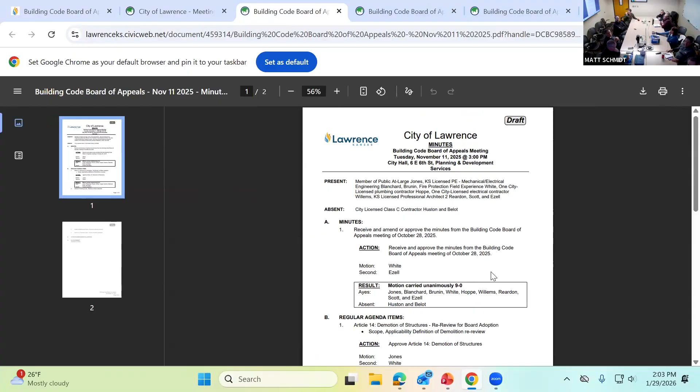Okay, did everybody get a chance to see the minutes from November? They're online, probably just the meeting recorded. We didn't have those last month, so we also have December this month. Any objections to the minutes? Is this summary right here, Matt? This is November. There's 2 meetings worth of minutes to review and approve, so this is the first one.

Going back a ways, if you recall, we did those several ordinance approvals. Cleaning those up are the demo, and then we went through plumbing, mechanical, fuel, and gas. We just did demolition. We did the other ones previous, so we came back with some edits to the demolition of structures that you guys wanted us to.

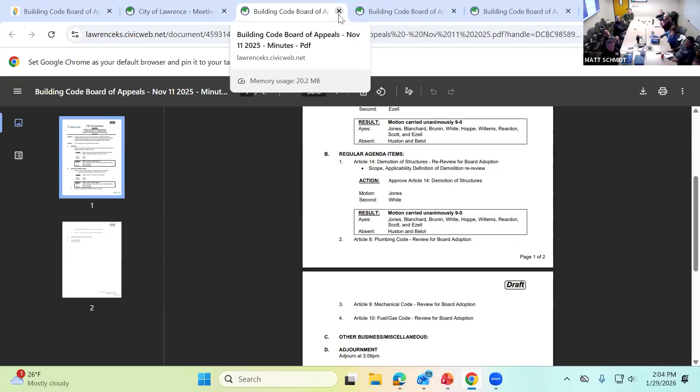You need to approve those separately. Yeah, this is the first one, and then we'll do the next one. We want to approve it first. Motion to move, Warren, I'll second, second by Adrian. All in favor? Aye. All opposed? What was JJ's response? Aye. Okay, there we go.

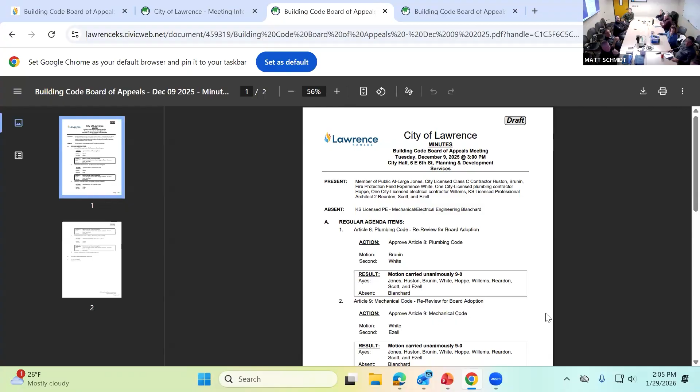And then this is December 9th. So then this was adopting plumbing. We adopted mechanical, we adopted fuel and gas. Here we gave you a quick overview summary of the accessibility, with no proposed amendments. We didn't adopt it, we approved it. Okay, yep, we did. So this is the follow-up with plumbing, mechanical, fuel, and gas, and then we reviewed and adopted accessibility.

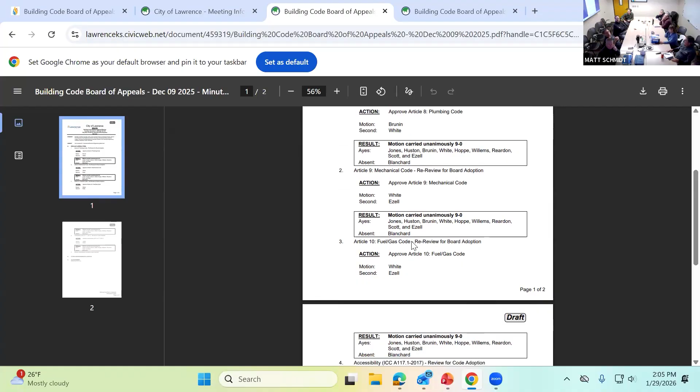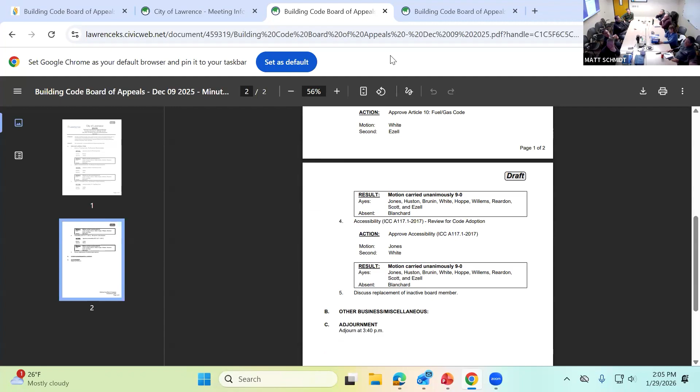Sorry, flip around, those are the reference standards in the code, referenced in the standards, reference standards, Adrian. And that was all. I'll move to approve. Second. All in favor? Aye. JJ, yep, I said aye. Any opposed? And that also passes.

Excellent. First, before we get into IRC, was to give Mr. Myers a chance to introduce himself for those who don't know him. Mike? Hi everybody, Mike Myers, Hurley Associates. I've been working in town here since, I don't know, it's going on 30 years now. I guess I've been a licensed architect since 2007.

Miss Janet, if you're ready. Janet Smalter, for those who don't know her, registered architect, and our residential examiner, among other things. Right into the presentation. If you'll hand me the mouse.

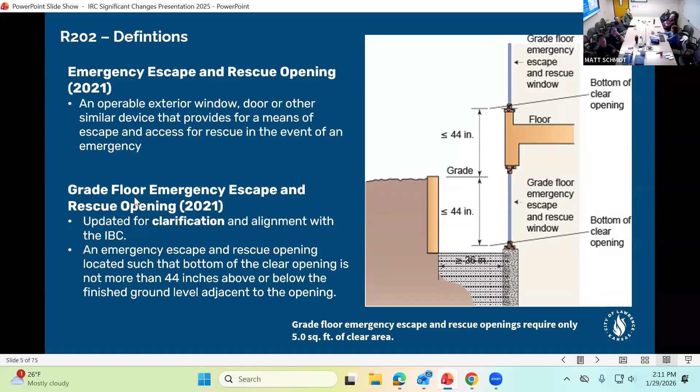What they're trying to say is just that the opening should start at the glazing - it's 44 inches. The bottom of the clear opening is where it starts and ends at the grade for a grade floor opening, and from the grade to the opening again for that 44 inches when you're doing grade floor emergency escape and rescue openings.

So they don't use that windowsill anymore. Right. Townhouse definitions - this is significant when we go later on in the review.

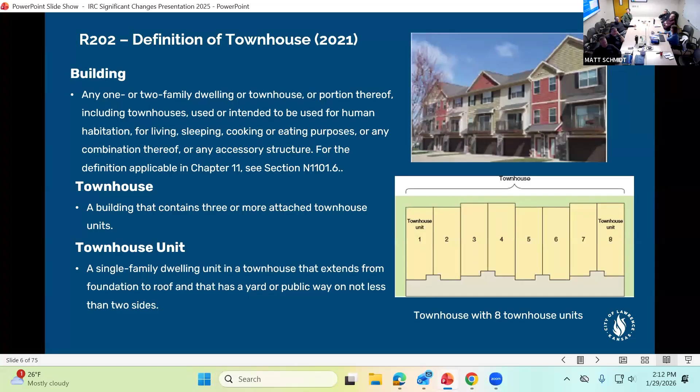They are now saying a building, they break it down to building, a townhouse, and a townhouse unit. So the building is a structure of a one or two family dwelling or townhouse, and it includes accessory structures. Then a townhouse is a building that contains three or more townhouse units, and a townhouse unit is a single dwelling. We'll see why they use that later on in this review.

Then the next thing is an addition that I'm proposing for the city - this is a City of Lawrence definition. I do want to take out the word duplex; no longer do we need this word, it's antiquated and not to be used anymore. The ICC codes use two family dwellings as the definition. You do not see the word duplex in any ICC codes - two family dwellings is used.

Obviously, a dwelling is any building that contains one or two dwelling units designed to be built, used, rented, leased, or let out or hired to be occupied. The City of Lawrence Land Development Code now defines that type of structure as a two-unit dwelling. They refuse to use two-family dwelling - I begged them to use that, and they would not do it. They use two-unit dwellings, so no longer will we use this terminology in any reviews that we do.

The planning department will use two-unit dwellings, and I will use two-family dwellings.

The definition of a rain screen system is not what you think of as a rain screen. A rain screen system is that area of airspace behind the cladding.

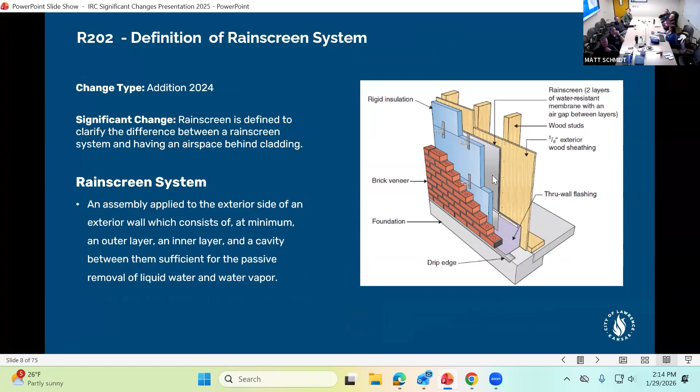So what is the confusion, Janet? Do you ask for a design professional sometimes and other times a registered design professional? Yes. Why would you ask for a design professional as opposed to a registered one? Just somebody that knows what they're doing, knows how to draw a set of plans -- don't hand it to me on a napkin, basically. But when I mean a registered design professional, I mean somebody like me who has put their license on it.

If there were objections saying all plans have to have that, you're saying all plans do not require a registered design professional. So is it that if they differ from the code they need a design professional? Exactly. If they're designed outside of the prescriptive code, if I cannot look up and verify that it meets the code requirements in the book -- say they design a beam I cannot verify by reading the code book -- then I would ask for a registered professional to provide stamped plans. And you also have to meet the minimum standards of the state. So if the state requires a registered design professional, the city can't override that.

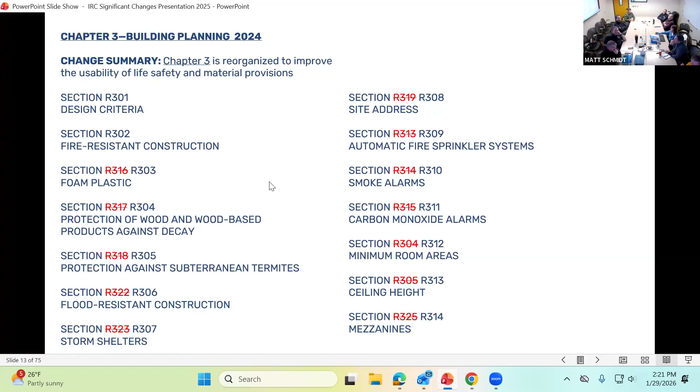All right, so part two is building planning, and we will go through that now. For whatever reason, they decided to reorganize all sections of chapter 3, and I can only imagine sitting through that meeting and how long it must have taken for them to agree on the reorganization of this section. So that's what they've done here.

Nothing's really changed of significance here. I think they dropped this down to either 115 or 110, I can't remember. The snow loads have not changed. Nothing else I can think of along here. We'll stay with the same frost line depth. Nothing else -- so on the winter design temperature.

Now that we've moved significantly from 10, is that -- if she can call me and go on speakerphone if she can't get logged in -- J still saying 10, but the design temperature is now 4. Well, I've always gone with the ASHRAE design temperatures, and I will get that verified with whatever.

Yeah, the thing says they must have been updated less than 20 years ago. But it looks like somebody's gone to a 4 for our area winter design. I think that used to be like an 8 or 9. Yeah, I will have to verify it with the book and whatever.

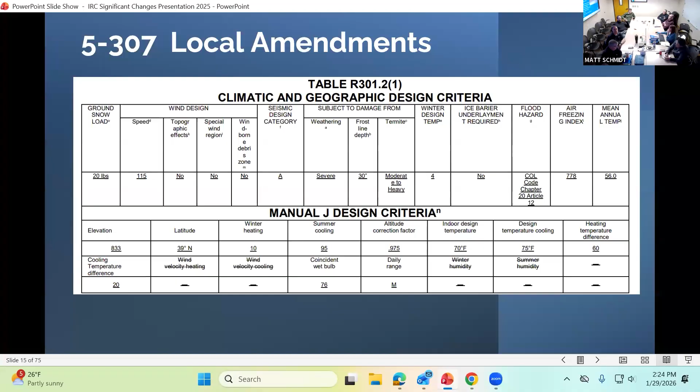Oops, sorry about that. And that's gonna get more important when we get to chapter 11. Yes, it will be. So we'll make sure that we verify all this and that it's correct with the current code for 2024. Okay, so intermodal shipping containers are an addition that were put in 2021.

And it basically says that anything that's in the IBC as well requires an engineered design for the use of these containers.

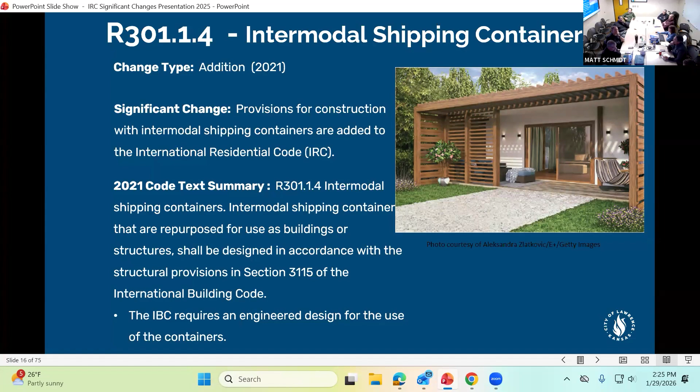We've had quite a few applications with these intermodal containers. Studio 804 did a project using these containers. They had quite a bit of difficulty making them code compliant and energy compliant, but they were successful. I don't think they'd ever do it again. It costs more than just building normally. We've had a couple other people approach us with it, but they turned around and said, nah, maybe not. So I don't know how many projects we'll see with it, but they're now in the code.

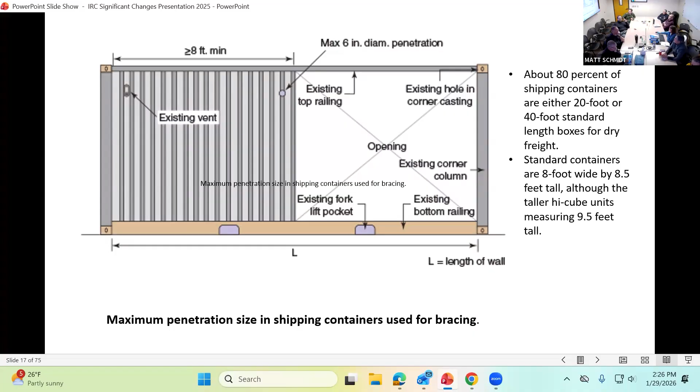Size is just, it's challenging to make them useful because the openings are limited, and there's just a lot that has to be done to make them energy compliant.

Exterior walls — this is gonna be one that we're going to be challenged on, and I think this will be one of the things that we'll have to look at and discuss further. This is a change that has been needed and intended since the 2018 codes, as far as I can tell.

What they want us to do is, the intent of the code is to say that there is an imaginary lot line on all townhouses and two-family dwellings, and that imaginary line extends all the way to the property lines. You have to fire rate the structure all the way to the property line, so any extensions, projections, or openings have to be fire rated along those lines.

So what I'm trying to say here, we'll go to the next one: decks. Everything — overhangs, balconies, two-story decks, etc. — have to be fire protected.

Are they asking for structural independence at this point for a two-family dwelling? Yeah, they are, because they haven't in the past, and that's what I need to study a little bit further.

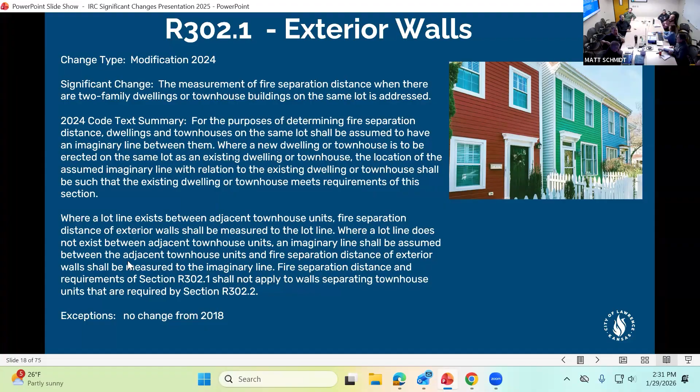Have they taken out the section on draft stops in lieu of separation in the attic then? I don't know the answer to that yet - I haven't studied it carefully enough, so I'll have to come back to you. But let's see what they're saying.

I'm getting to the point where it sounds like there's not a whole lot of difference between a two-family dwelling and a townhouse. And I think there is an intent to be a difference, right?

It looks like they are requiring it fully extended to the exterior walls, roof, or foundation for complete continuity. So I don't think you can do the draft stop - there hasn't been an exception, at least in 2021. Maybe that's changed.

You just have a draft stop in the attic - but it specifically says roof. That would have to be a barrier wall between the two roofs - fully extended, that's almost like a block wall. Beyond that, there's always been an exception, I don't know if they've taken it out, but it's still in there.

If we're looking at 302.3 - under the significant changes, in the 2024 code: dwelling units and two-family dwellings shall be separated from each other in accordance with sections 302.3.1 through 302.3.5, regardless of whether a lot line exists between the two dwelling units. So it's 1 hour regardless of whether there's a lot line between them or not.

So what happens when you go in after the fact and make them into townhouses? That's the issue. No matter now or in the future, whatever, whether there's a lot line between the two units of the two-family dwelling, it's still just 1 hour. But I don't understand what the issue is.

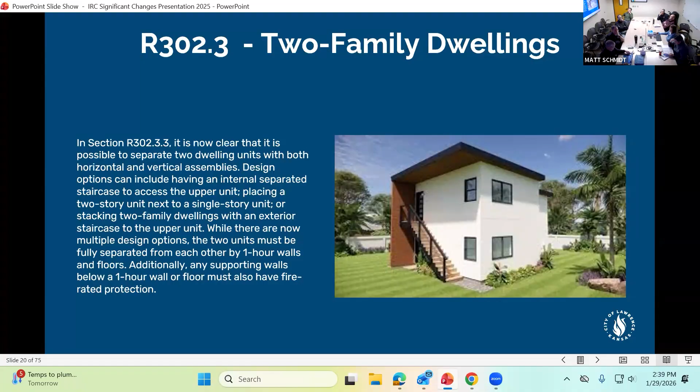So for 2-family dwellings that are separated horizontally, there's some more information on what's required for them. There's lots of options, but now it talks about how you have to have fire rated protection with the supporting walls, etc.

It also now requires that the smoke and CO alarms have to be activated in both units. So if there's a fire in this unit, it activates smoke and CO in the other unit as well. That's a new requirement.

I'm not sure I'd ever want to live in one of those. It sounds like a good idea. It's a good idea for life safety. It ain't a good idea for a bad cook.

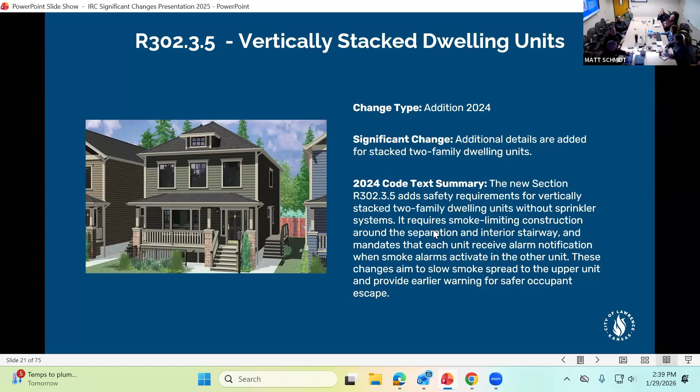Is that only on vertically stacked units, or side by side? That's only on vertically stacked units, not side by side. Correct, vertically only. Apparently this has become a very common design thing in other parts of the country - shared accessory rooms in a 2-family dwelling.

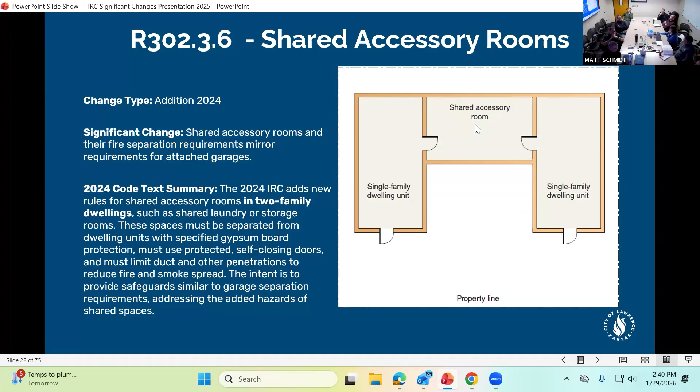It's for like laundry or storage rooms. So what the fire protection is similar to, like if this was a garage area - the separation is 1/2-inch gypsum board on the walls and ceilings, and doors are the same type of protection.

I don't know how this gets regulated as far as how people keep it between themselves as far as ownership, but that's a civil problem, not a code problem. It's a very strange kind of setup, but I've actually seen it allowed in an existing building on Ohio Street. Don't see it very often - older building, nothing new.

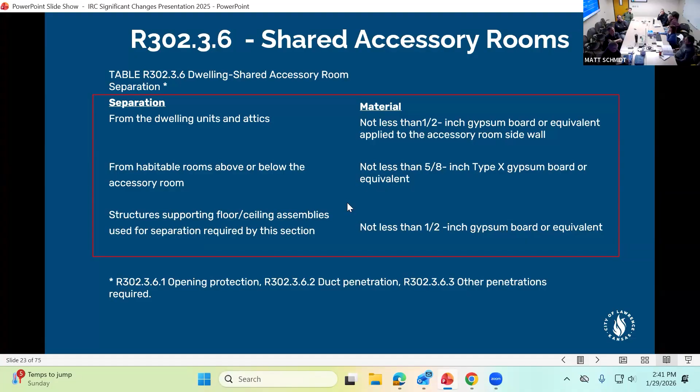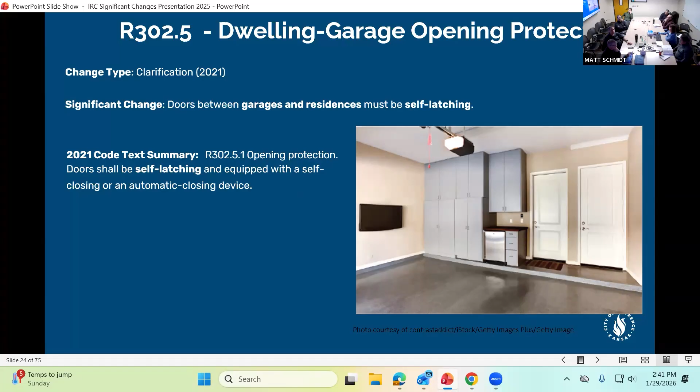Garages now also - those garage doors now have to be self-latching in addition to self-closing. That's a clarification, apparently in the 2021 codes.

They are now allowing clearances to be 6'6" in basements and on main floors as well, for beams, with a distance of 36 inches between the beams. Apparently that's based on door heights, but it used to be 6'8", 6'8" to 6'6".

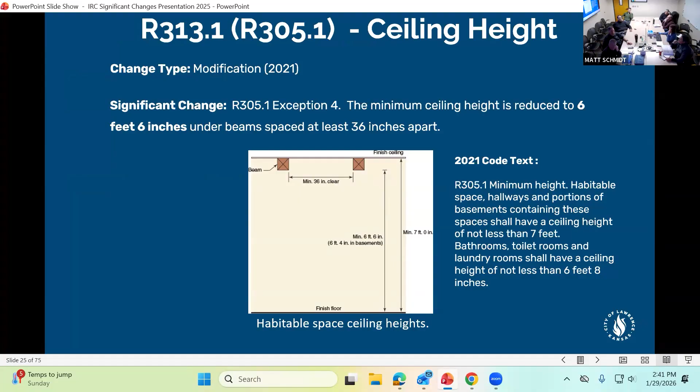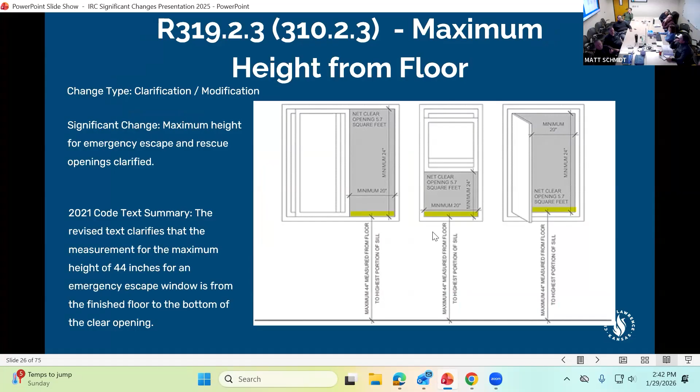They tried to clear up again the clearance, the distance of openings to windows, and for some reason they're making it harder for people to understand. It's to the opening of the window, not the rough opening of the window. So it's 44 inches to the opening of the window itself.

They are no longer calling these areas window wells. They're calling them area wells for emergency escape and rescue openings. And then they give some different information on what the clearances are in those areas.

Can you go back to that real quick, Janet? Didn't that say 30 inches down there on the bottom picture? Did that used to be 36? Used to be 36 and now it's 30 inches. And then there's discussion on how the steps out to grade are allowed, et cetera. Is that only when you have steps out? Because I thought on the previous picture it was 36, but now it's 30. Yeah, this whole section has all been rewritten.

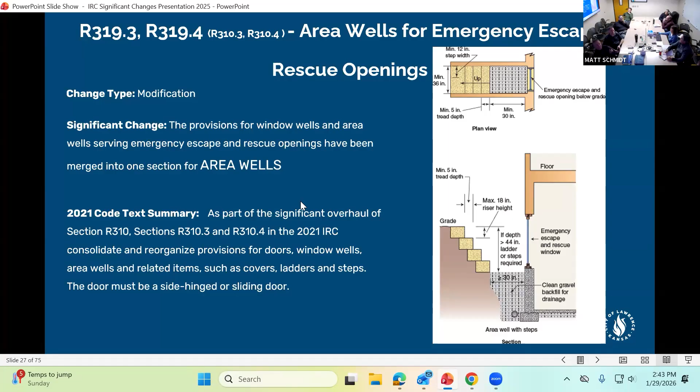Smoke alarm installation is now based on the manufacturer's instructions, and it's basically all about interconnection of the smoke alarms, et cetera. They've kind of given up writing how it's installed in the code.

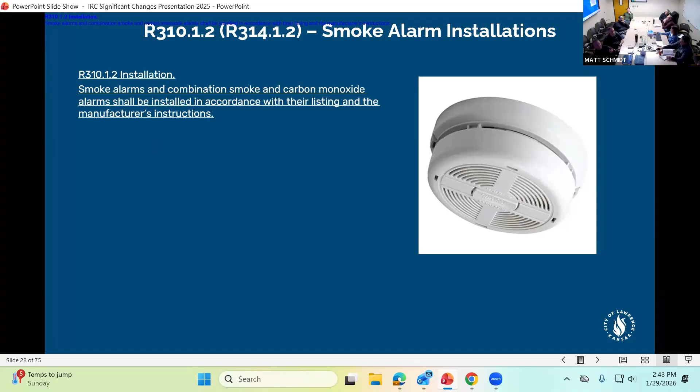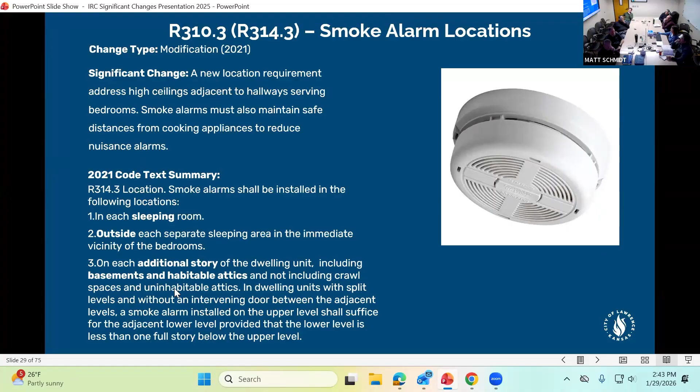Pretty funny. Smoke alarm locations are still all the same here: in each sleeping room, outside each sleeping area, et cetera. And then they've added some stuff having to do with smaller unit designs, tiny houses, et cetera. They've also said, in a hallway, if the hallway gets taller, then there needs to be a smoke alarm there. And then they're talking about smoke alarms adjoining sleeping lofts and smoke alarms near cooking appliances. They've clarified that information.

Dan, previously did I see something about attics? Not required on uninhabitable attics. Okay, can you just... I don't think that's changed, Adrian. Not required — is that what it said? That's what it said, okay. Wouldn't that be with temperature requirements with the detector too?

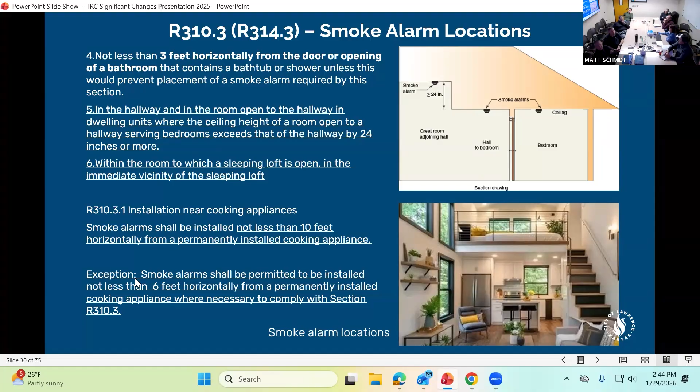Carbon monoxide alarms — this is new, and this is going to be a shocker for our contractors in town. When you are repairing any existing fuel-fired mechanical systems, this will now trigger the requirements for carbon monoxide alarms to be either installed or confirmed existing, confirmed that they're in place or needed to be installed.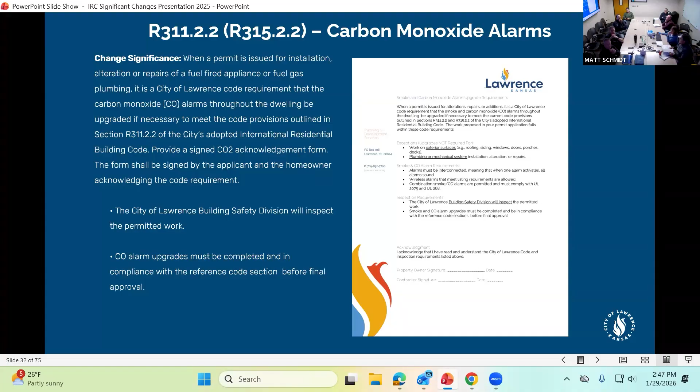And if we can go back, because I didn't read it, I have trouble seeing it — so if you work on a furnace, like you're going to change the board or something on the furnace, you've got to upgrade your CO in all the locations that are required. Okay, and does it specify working on the exact — I'm just using this as an example — Sarah came in, worked on my zoning dampers.

Does that kick it off, or is it just working on that equipment? Any fuel fired equipment, yeah. So we strongly suggest people have annual maintenance visits, which may require a new contactor or a new capacitor for the motor, which would technically be not just maintenance, but repair. And that would trigger a whole house CO check.

Would that require a permit? Well, it says any repairs. Repairs don't require permits, but it says installation, alteration, or repair. It doesn't say it's triggering a permit, it's saying it's a repair. So every time somebody calls me for their $125 check, they're gonna end up with a $600 CO bill.

Right, well, I'm just pulling this from the code. Remember, collectively as a group, you have the ability to talk about amending certain things out. So I'm not gonna get in a long conversation now. Again, this is one of those, what does it really mean situations. Yeah, that's why Janet identified these for you. Hey, that's another one to highlight.

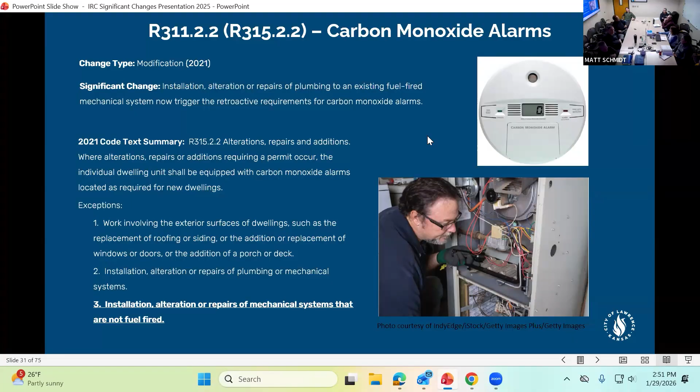So that's something, I would say Adrian does not want to pay for that right now. I'm grandfathered in now. We're on the residential, but we get into the commercial. Have you got the bill yet? I haven't got the bill yet. So you may not be as happy as you think you are.

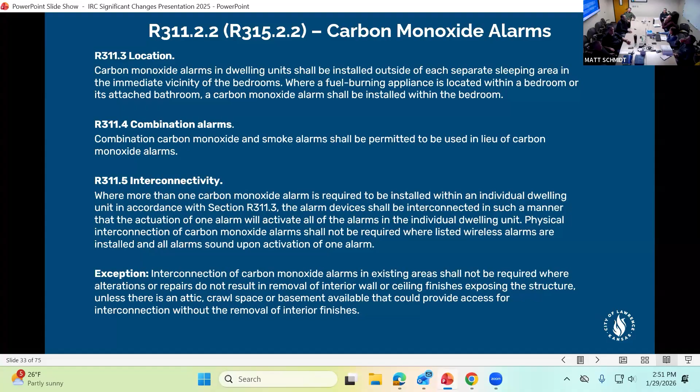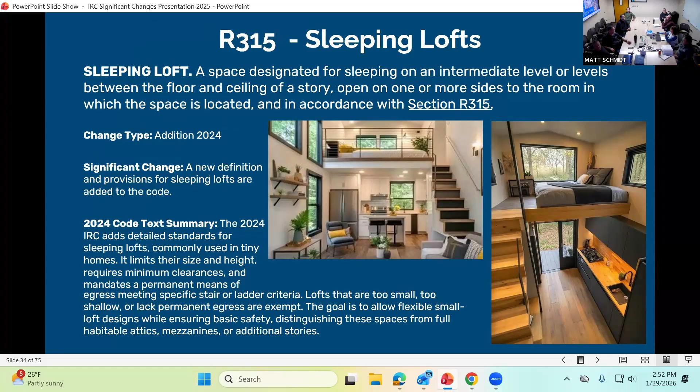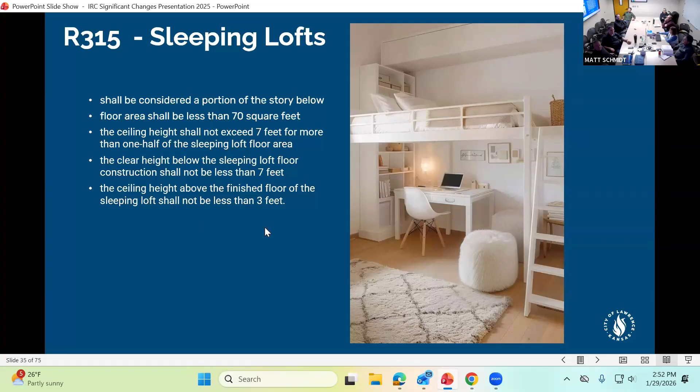And here it says where they're allowed: they're a portion of a story, less than 70 square feet, and ceiling height is 7 feet or more, et cetera. So that's added. Garages now, EV charging stations and automotive lifts are added to the IRC, and that's introduced in this section. It goes on to talk about them, and we'll show you more information about how they're protected in the garage.

So Janet, what is this, the requirements for EV charge stations, or are they saying they're required? Well, it says EV chargers are added to the IRC to address installation of the equipment, and new requirements for them must be installed per this. I don't believe they're required, but there are requirements to install.

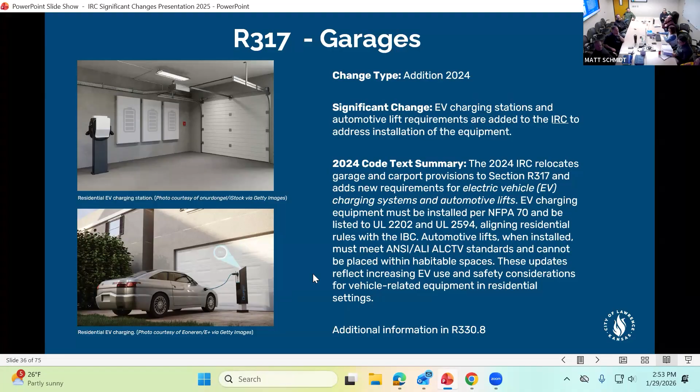It also points out that you cannot put lifts in habitable spaces. I love that part. You can't put the lifts in your living room. I've been in houses in Kansas City that have cars inside. Yeah, I love it, it just correct.

Accessibility has been updated for care facilities that are in homes. That says that the part of the business that is the care facility has to be fully accessible, which I think is fantastic. I'm glad they've added that.

Storm shelters, they've gone on to say that it must be sealed, drawings must be provided that are prepared and sealed by a registered design professional. And I'm so glad to see that. It meets the criteria of the ICC, or the design meets criteria, and they have to have a certification. I have had several battles with people that have submitted drawings to me that do not meet either and had to deny them, so.

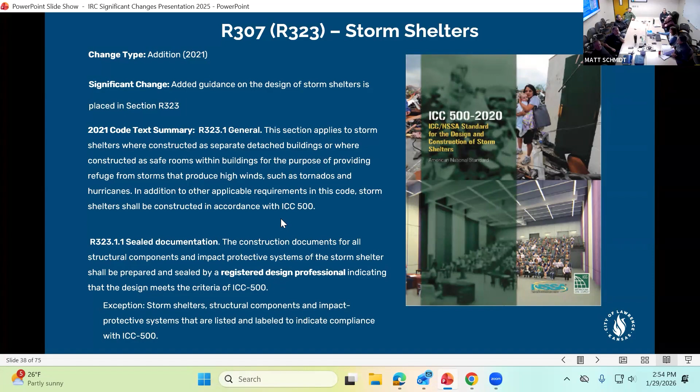And said that you can only call that a closet. So, all right, here we go.

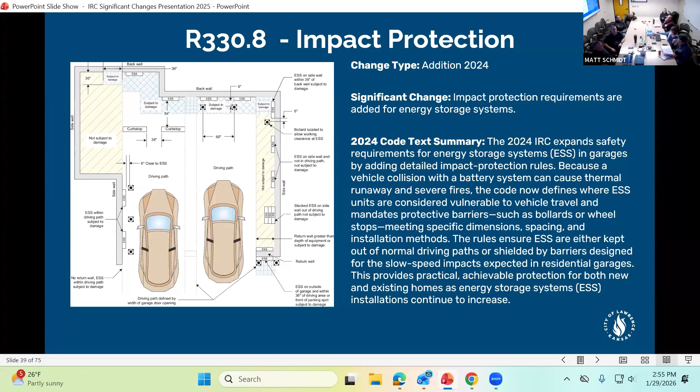Significant changes: this adds, based on the mechanical, section 1307.3.1, information for impacting mechanical appliances.

This is a modification: they are now calling a habitable attic a story, which is fantastic. They also identify when a habitable attic is not a story. It's either when the aggregate area is not greater than 1/3 of the floor area of the story below, or not greater than 1/2 of the floor area of the story below where it is located with a sprinkler system. It has to meet all these conditions.

Or the occupiable space is enclosed by the roof assembly above with knee walls. If you guys can read that, I just need some water here. Otherwise, it has to be sprinklered.

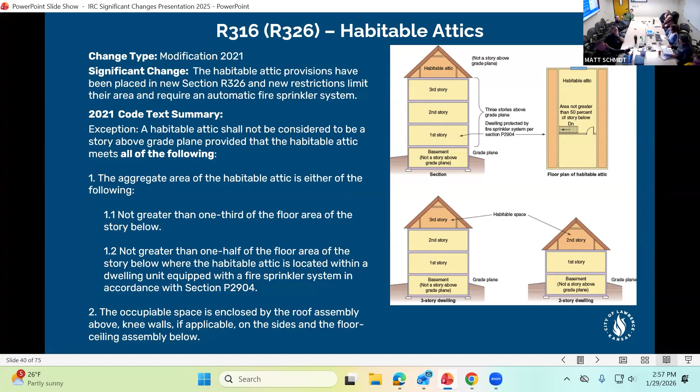So this is a nice little code section they've added in here. Of course, when it becomes a 3rd or 4th story, then this gets triggered into being under the IBC. That's good.

And the means of egress obviously needs to be met, as it can't be a pull-down stair, it can't be a ship's ladder. There can't be any of those cute little means of egress.

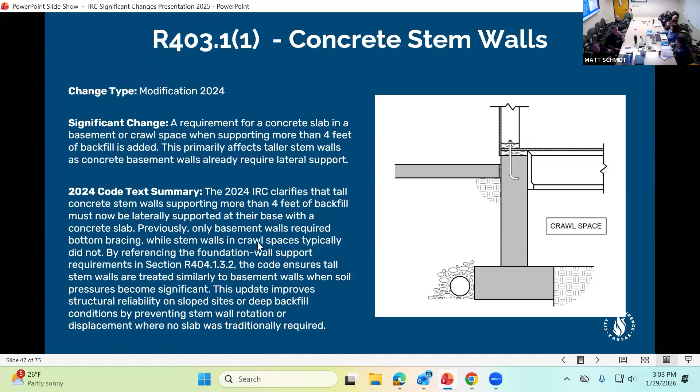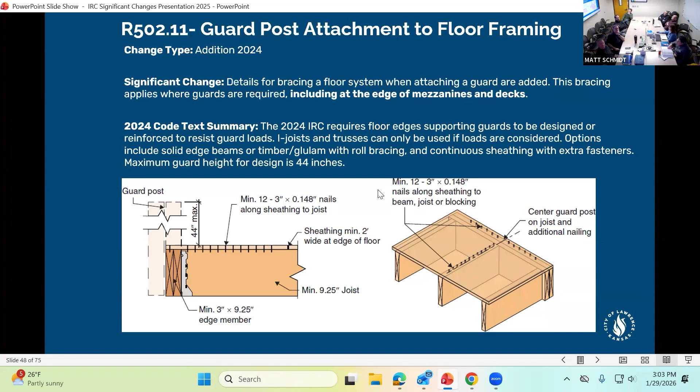Guard post attachments to floor framing—they've come up with a bunch of information here. I think that's fantastic, and I'll be able to cite that to quite a few deck framers in our community who need this information. This is a really nice set of information, and these pictures are actually in the code.

This doesn't just apply to exterior decks, it applies to interior framing as well. I didn't even think of decks when I first read this, but it applies to decks too.

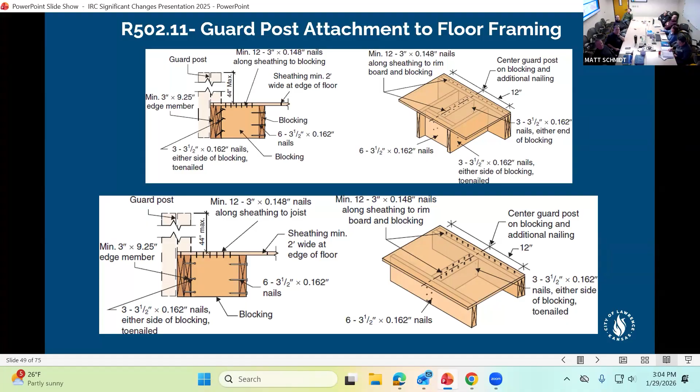Deck design loads—this is new, started in 2021. Deck design is now based on live and snow loads, whichever is greater. City of Lawrence deck live load is 40, ground snow load is 20, so we will now use the deck design load of 40 PSF.

Important reminder, as we've been doing consistently on all our slide presentations: we're skipping 2021 changes. When you see 'modification' at the top, that means it came into effect in 2021 and is just a carryover into 2024. If you don't see '21' noted, we've identified it as new for 2024. Keep that in mind if you pull these slides up at home.

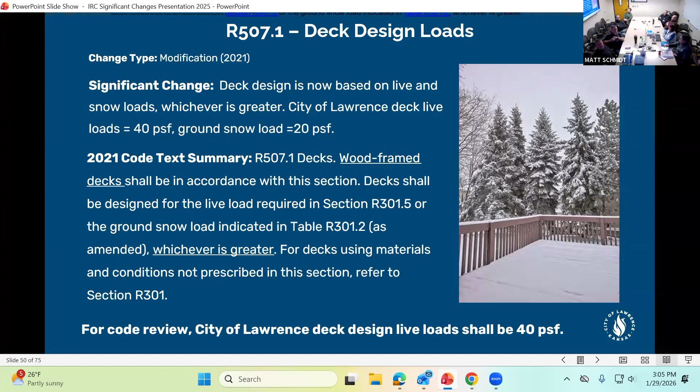Under the IBC, minimum deck loads will be 1.5 times the associated room live load per the 2021 IBC. So if you're building a deck off a sleeping room, it's 1.5 times the sleeping room's 30 PSF design load, whereas all other rooms are 40 PSF—so you'd have a different design load depending on that deck's associated room.

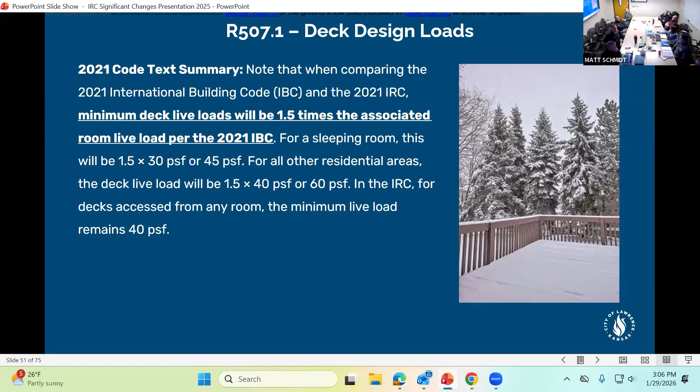So if it's 100 PSF, it's gonna go to 150? Yeah, right, exactly—though I think 100 might be the max. Well, if there's a hot tub designed for that deck, there's a whole other design load for it. If you want to land a helicopter...

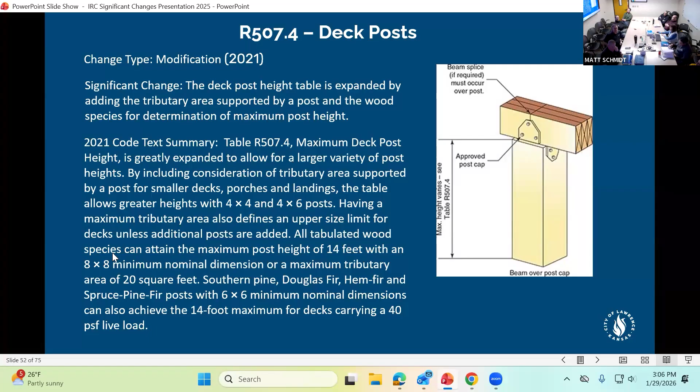Deck posts now have a table of their own, which is really nice. I'm very surprised at what a 4x4 post can hold, and the height it can reach. This table is based on your tributary area—once you know your tributary area, you can determine how tall a 4x4 post can go.

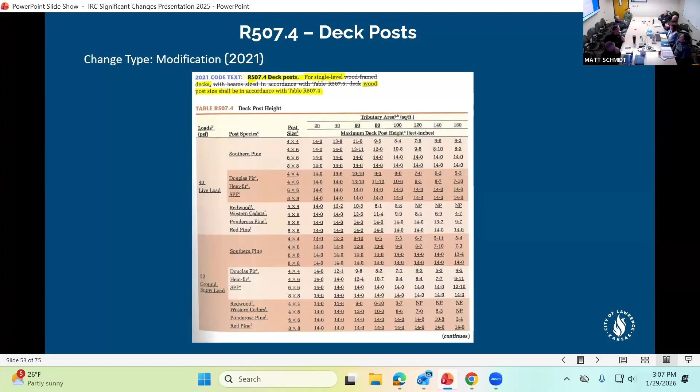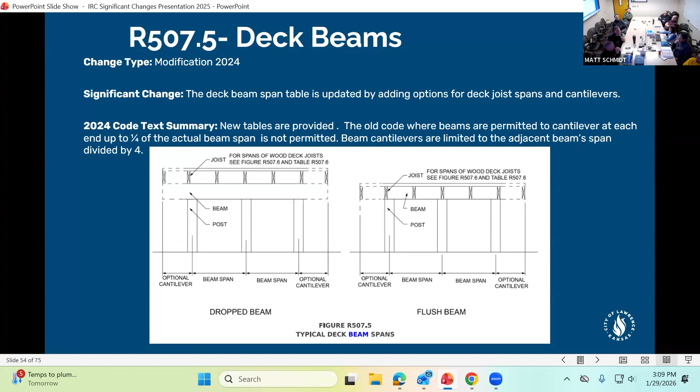It's kind of a complicated, crazy little chart, but once you figure it out, it's very useful. There's lots of charts.

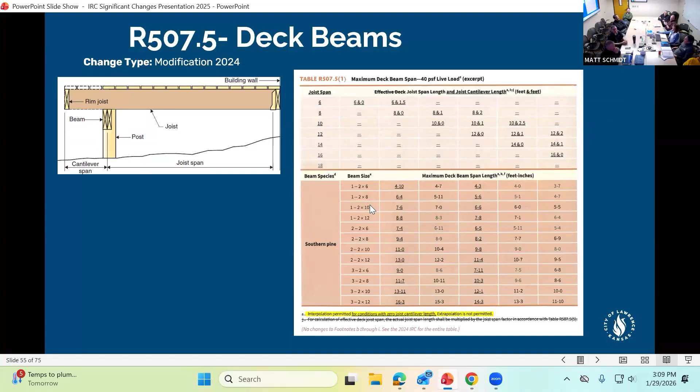Putting me out of work. Yeah, sorry about that, putting me out of work is right. No structure needed, yeah, we got a chart.

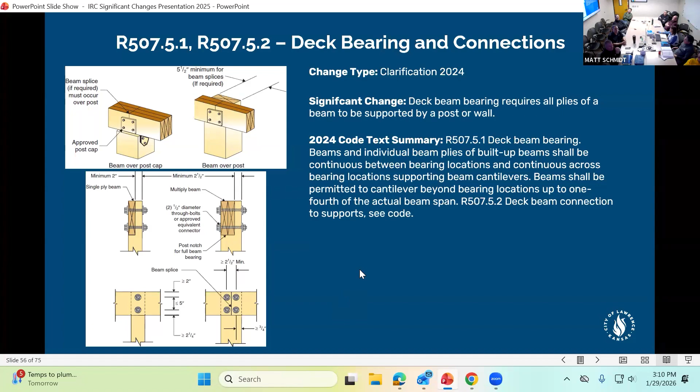In 2024, they say that all beams have to bear on the post now. You can't have any outside of the post, they all have to bear on the post or wall. That's a big change regarding shear connections.

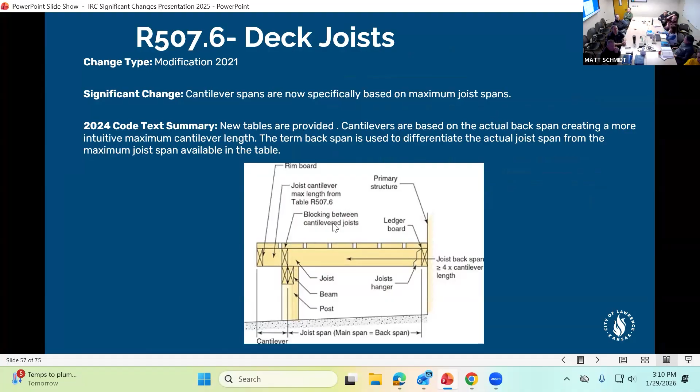Next slide, deck joists are now, this is a kind of helpful little chart. It shows deck joists and the maximum cantilevers, going on to show you how you can do your joist spacing and maximum cantilevers. This is going to put you out of work too a little bit. It's a tricky chart, but if you follow everything carefully, you can do your designs for that too.

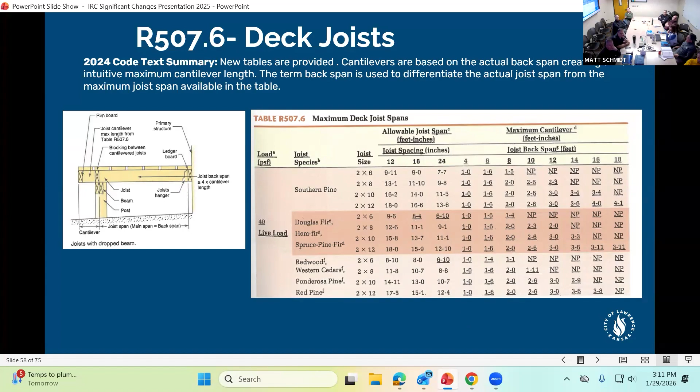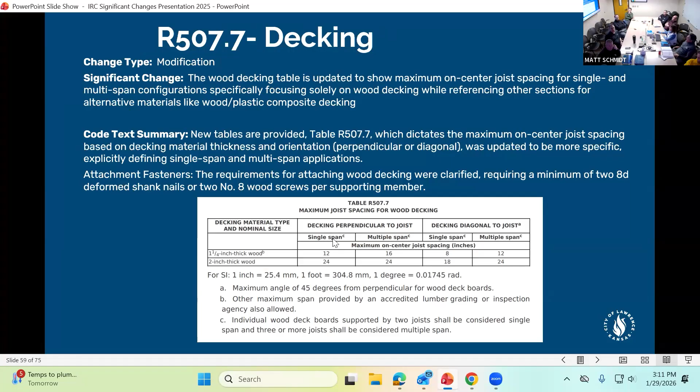For decking, they've updated this so that you have maximum joist spacing for decking with multiple spans and single spans. It used to be just single spans, and now they're using multiple spans. That's nice to have as well.

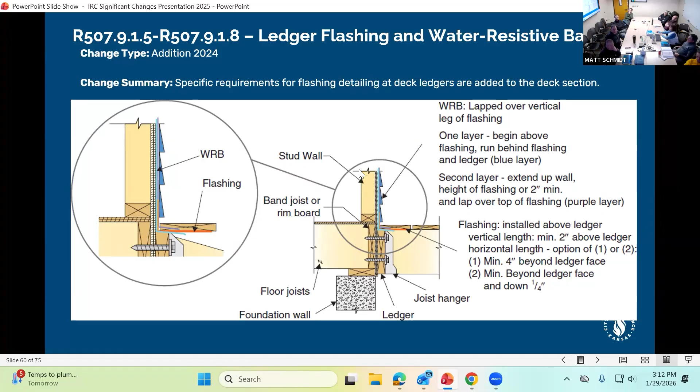Building a deck on an existing building, so.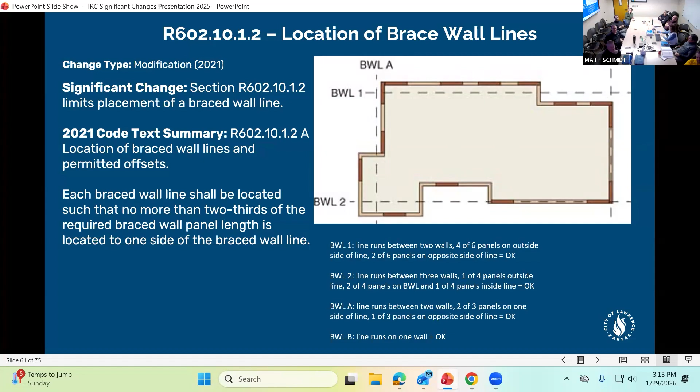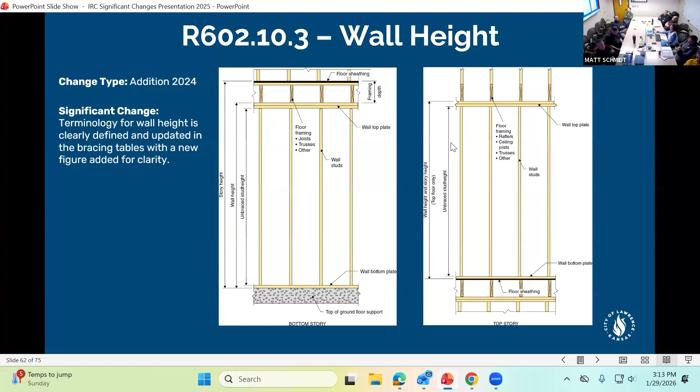For wall heights, terminology has been clearly defined and updated in the bracing tables with a new figure added for clarity. The wall height on the first story is from the bottom of the plate to the top of the top plate, and the story height is to the top of the floor. At the next level, it's bottom plate to the top of the top plate, and that's also the story height.

Addition here is about garage doors now having a permanent label that identifies the wind pressures, but it also identifies the insulation values, which is going to be important when we look at the energy codes. This is key, this is cool, I'm glad they're doing this. This will be required.

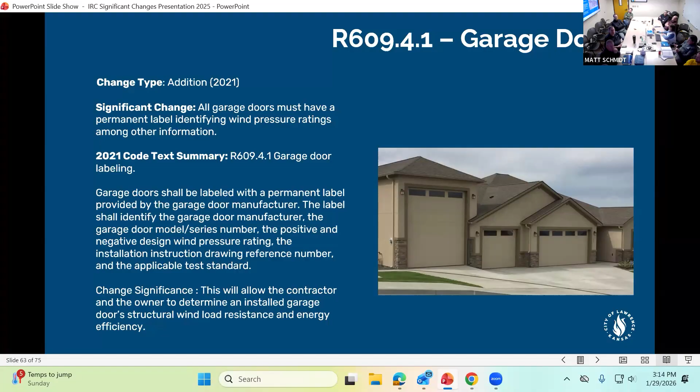Why would a garage door affect the energy code? A lot of people are using garage doors on their designs for inhabitable spaces, inhabitable spaces, not just like deck openings or interior. Conference rooms, yeah, yeah.

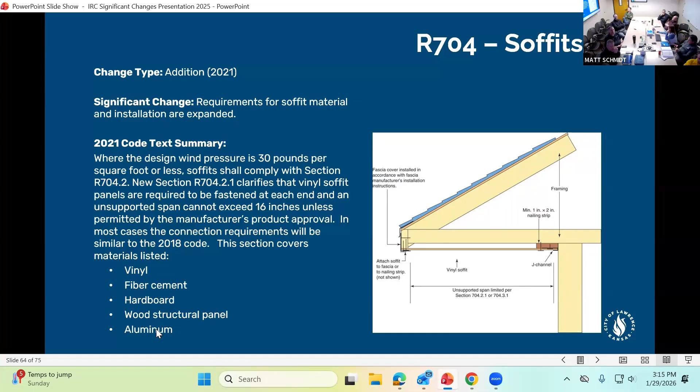Soffits now have added requirements for soffit materials and how they're installed, which is a good thing. It covers all types of soffit materials, so that's nice that they've added that. They've also added this material and how it's installed.

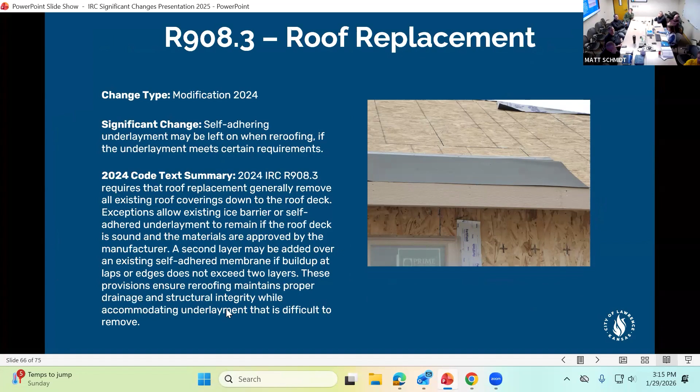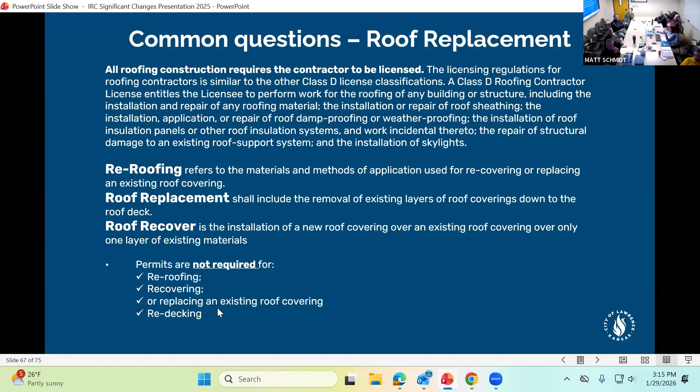Roof replacement, they're talking about self-adhering underlayment may be left on when re-roofing if the underlayment meets certain requirements, and they break down what those requirements are, which is good to have. And this is just something I threw in, this is not in the code. This is just I gave this to the contractors to understand where we stand on roof replacement and what the meanings are and when permits are required for it or are not required for it. And that ice barrier underlayment is not required as amended in the city code right now.

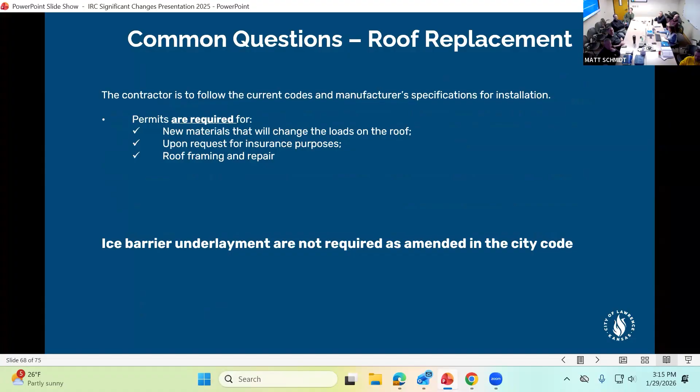I believe part 3 we're done with, and these are the things we did not talk about, so you can study them at your leisure if you want to before our next meeting.

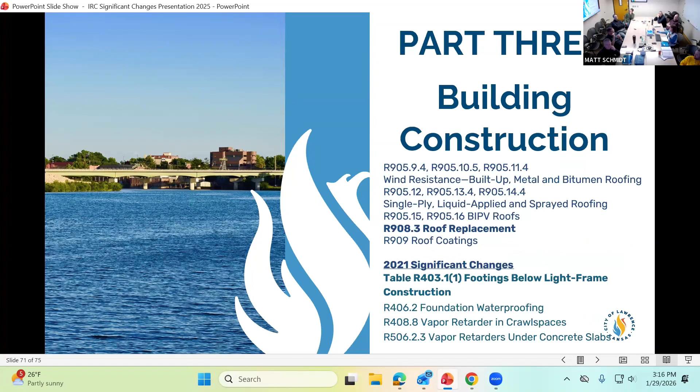Vapor retarders, they changed to a 10 mil from 6 mil, and then they went back to 6 mil, because in 2021 they went to 10 mil and everybody had a fit about it. So they went back to 6 mil. That was funny.

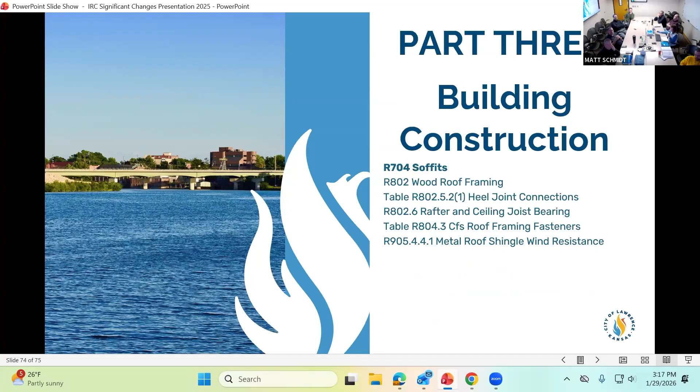These are such minor changes that I just didn't feel were necessary for us to go over. But if you disagree with me, great, I would love to hear about it, so please bring it up to me. And that was the end of it.

Do you know when CO detectors were brought into the code, required on new construction? Like how old of a house - if we're going in to replace a water heater in a 20-year-old house, there's a good chance CO detectors are in there. If the occupants put them in at that point, they're really only good for like 10 years if they're battery operated - it's not so much the battery, it's the sensor. Mine are wired and say 10 years. I had a battery go bad the other night and pulled it down, I was pissed, and I looked at it the next day - I need to replace the thing, it's 12 years old. And most of the new ones people are putting in now have a 10-year battery. That's what I'm buying, I'm not gonna do that every year. That way it'll last 10 years anyway - battery goes out, get rid of the thing.